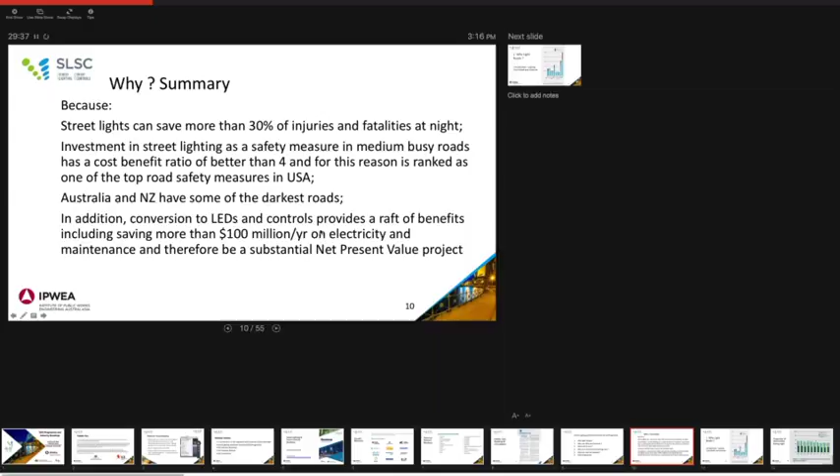A quick summary of what I'm going to tell you is basically why do it? Because streetlights can save more than 30% of injuries and fatalities at night. Investing in street lighting is one of the most cost-effective investments in safety you can make for dollars per injury or fatality saved. While you're doing an upgrade to LEDs, which we're suggesting one does, of course, you can address some of the gaps in Australia's and New Zealand's darker roads. Basically, we have the lowest lighting levels in the OECD countries. And of course, by addressing all of this at the same time as putting in the LEDs and controls, you can actually save a significant amount of money with a net present value. So let's go on to discuss exactly how this is the case.

And what we want to know is what effect can street lighting have on these rather numbers that we can't be so proud of. So if you look at the next graph here, which comes from, by the way, down here there'll be a number, and that number is the page number on which the graphs come from.

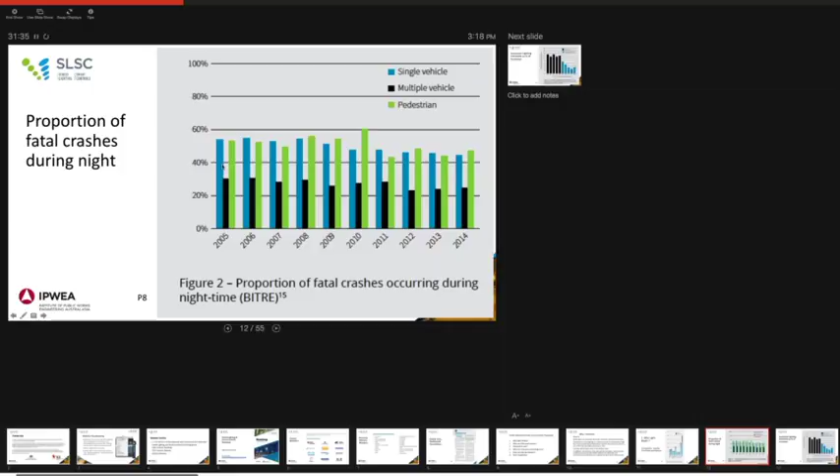If you see this graph, this is the proportion of fatal crashes occurring during night time, and this is in Australia. And you can see that across the years, the percentage is around about 40 to 45%, which is a large proportion given that people do not travel that much at night time. Most travel occurs during the day. So clearly, nighttime injuries and accidents are an important contributor to our poor statistics.

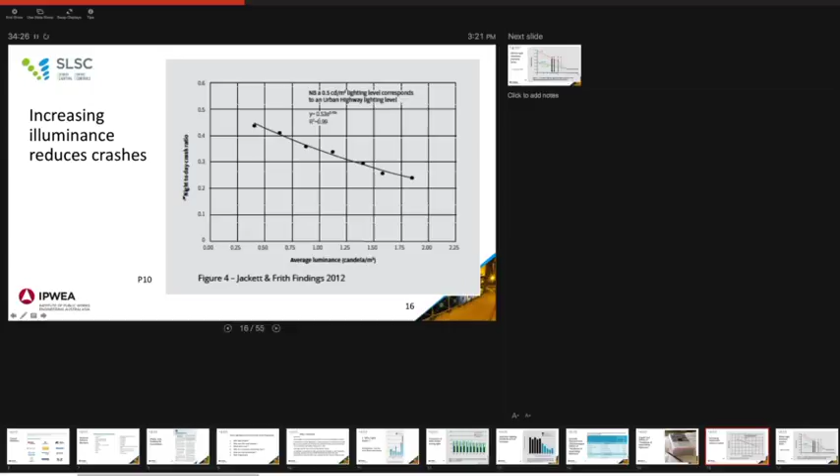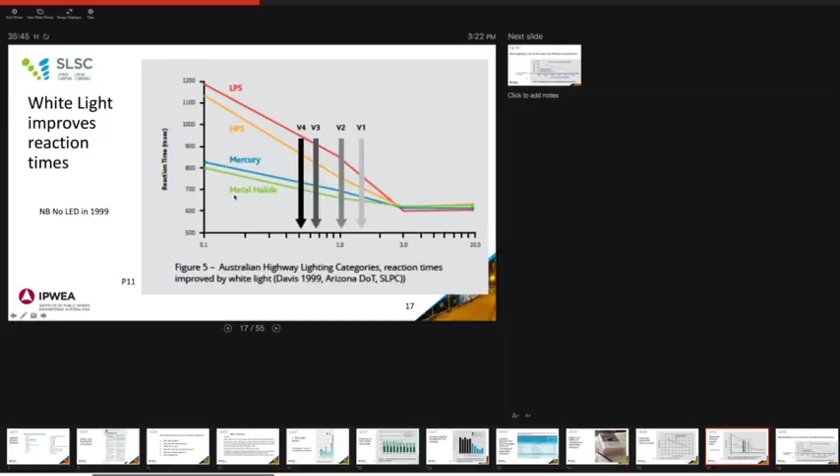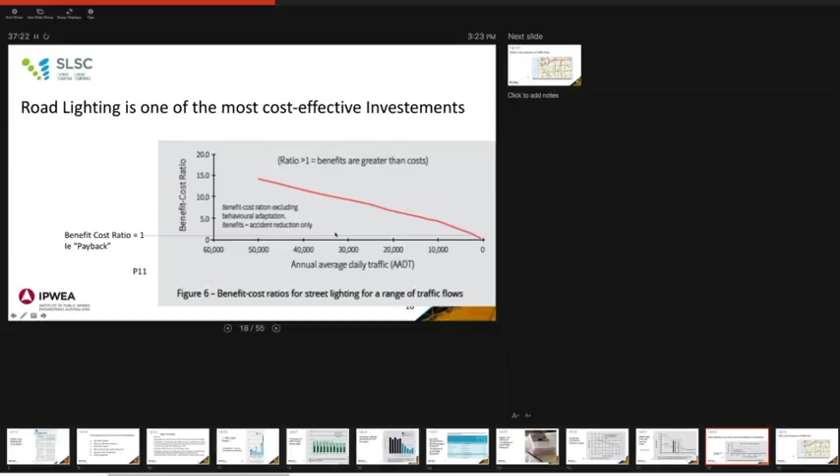And very soon after very low levels of traffic flow, you can see the benefit cost ratios are huge. If this were an investment, you'd be accused of trying to run a scam, because 10 times return on investment is totally unheard of. But that corresponds to about 30,000 vehicles annual average daily traffic, and you will see that on the next screen on a picture of Austroads AADT levels in Adelaide, and you can see there are several at that higher level on that graph.

So quite clearly, road lighting is a very, very important factor. I would argue an under-recognized factor of transport planning, or an under-recognized tool of transport planning.

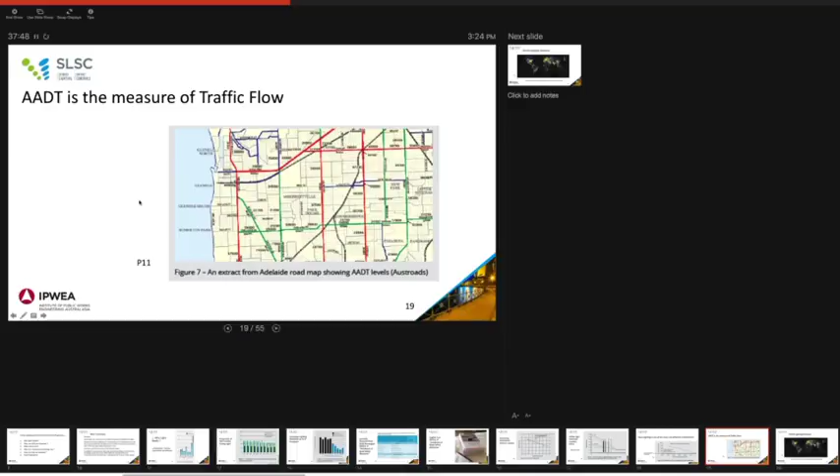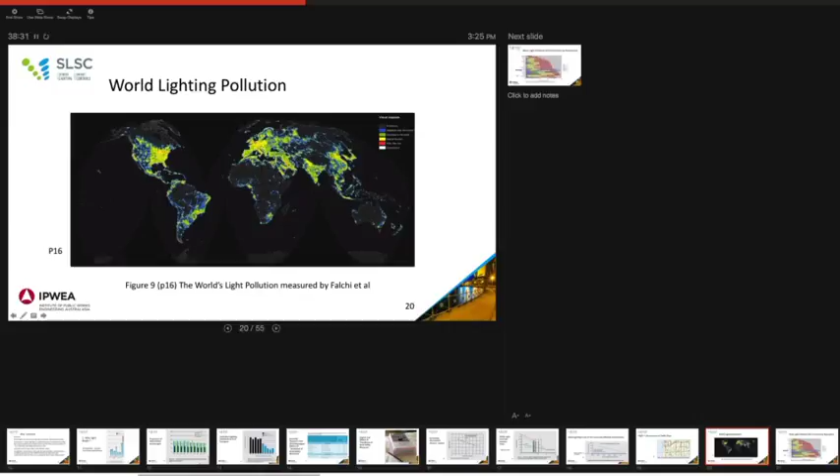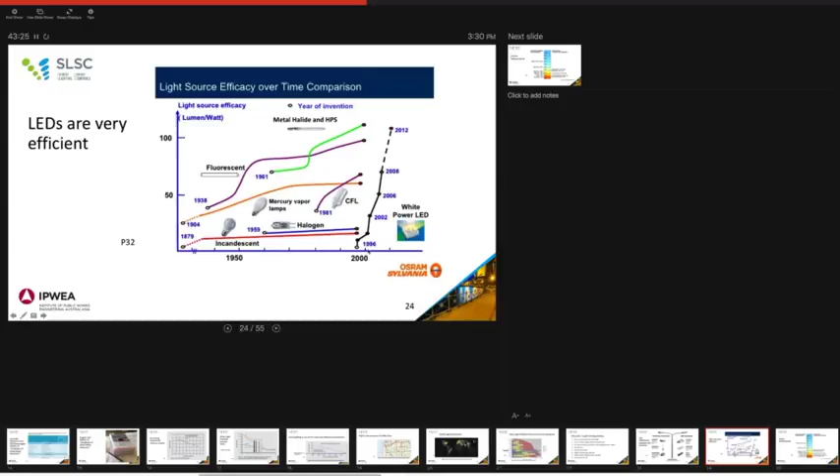Another important aspect of lighting is its color, because as I've already mentioned, its color has an effect on reaction times, but it also has an effect on human beings' ability to assess color or process images. A person seen in high pressure sodium with yellow light is much more difficult to recognize because you can't pick up all the different colors in their skin tones or their clothes, whereas with LEDs and mercury vapor, which have much whiter colors, you can. So that's an important factor.

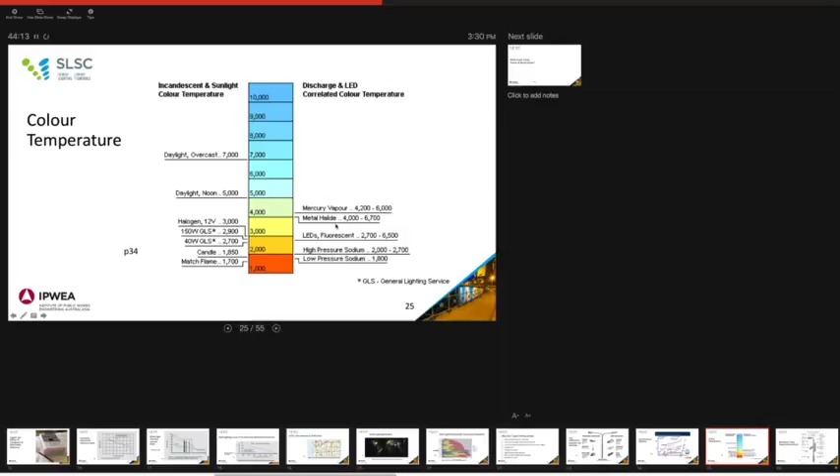The next question that I mentioned earlier was why we want controls, why would we want such things in our cities? Basically, they will bring about a revolution that is often quoted as being smart cities, but this actually also applies to smart towns and smart rural areas. How is that? Well, in Europe, they call it the humble lamppost.

And the reason for this is that the lamppost for a long time has been ignored, and now it's coming into its own. It's no more humble. In fact, not only does it have LED lighting and control systems that I'll mention do wonderful things for street lighting, but it is a magnificent infrastructure foundation for a whole lot of things.

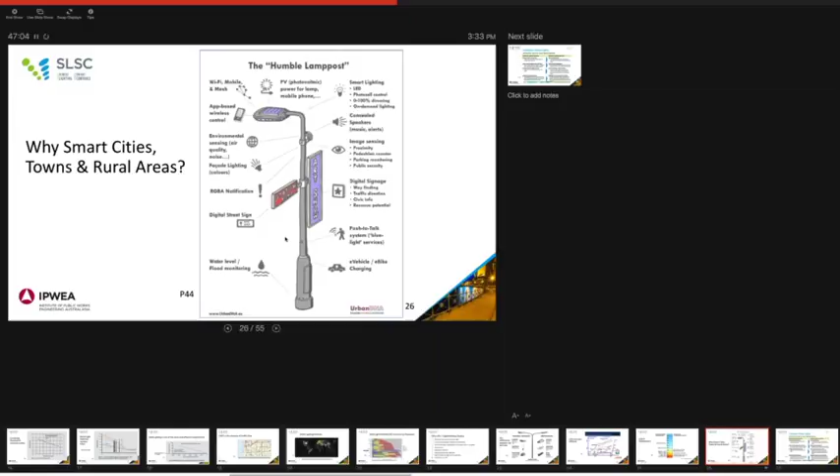Street lighting is infrastructure of thousands of points for every city, town, or village even, perhaps not thousands for a village, but the point I'm making is that you don't want to visit these things very much. If you're going to replace them with LEDs, install them in a way that future-proofs controls, because you're only going to be visiting street lights seldom. You don't want to visit them a lot because they're expensive to visit.

We can remotely monitor these lights that, like anything, eventually fail, but before they do, can give you plenty of warning, and you can gather 10 or 20 or 30 of them together to fix. So you can do smart asset management. You don't have to wait till they fail. It's pointless to let them fail, because if you get them before that, you can put them together with 20 others and make one visit instead of 10 visits.

Smart dimming and scene setting is a clear obvious one. You don't need lighting 12 hours a night. Only the busy times is where you need lighting, or the dangerous times, or whatever the community determines, but you certainly don't need it 100% of the night.

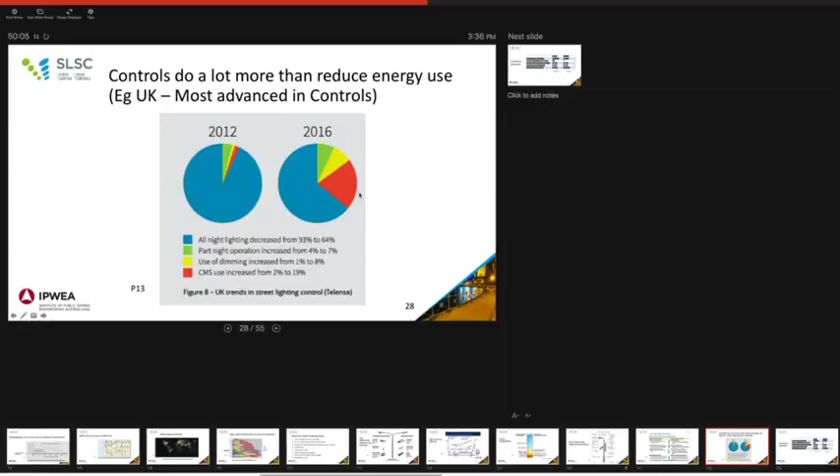One of the interesting facts that comes out of Europe in comparison to Australia is there they have 60 to 90 million lights, and in Australia you have 2.4 million. The proportion of streetlights over 25 years old in Europe is 75%. That's huge. We think that it could easily be the same here. We don't know. But when you put that together with the fact that you're going to save electricity and you're going to save lives and greenhouse gases, it's a no-brainer really to address this issue properly.

The roadmap contains quite a lot of information about controls to assist councils and distribution network service providers. It's not the mandate for this webinar to go into that sort of detail, and we move on, but just to say that it's there.

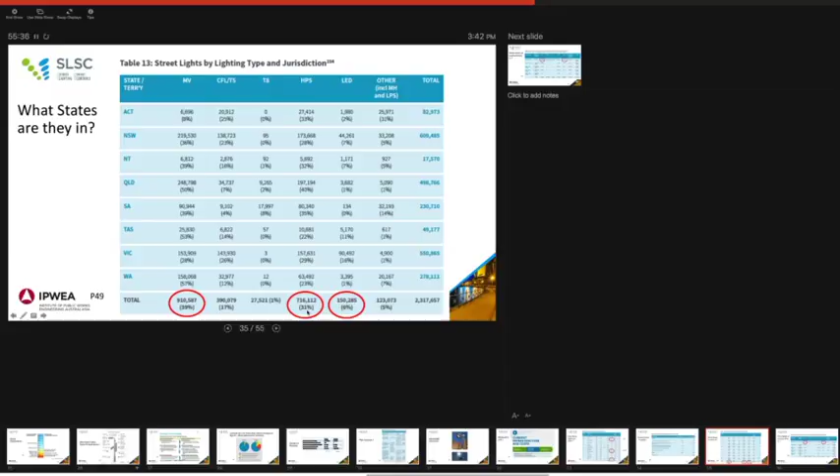Back to the streetlights. According to the electricity utilities, here is a breakdown of each of the states, with mercury vapor, the least efficient lighting technology available at the moment, and in fact clearly being wound down. 39% of Australia's stock is that very old technology, about 50 years old. High pressure sodium, around 35 years old technology, is 31% of Australia's stock. Only 6% are LED.

Finally, the estimated cost of running the current stock of streetlights had to be calculated so that you could calculate the savings when the new LEDs and controls went in. And so for comparing against a future replacement, the current stock of Australian streetlights, according to our calculations, is costing Australia 423 million per year, averaged across the 15-year life. And that's what we mean when we say levelized.

We calculate it because it's not a simple rectangle. It actually increases to the end, but the end is of course less expensive because it's in future dollars rather than present dollars. So that's all been averaged out, and we've made it simple by calling it $423 million a year.